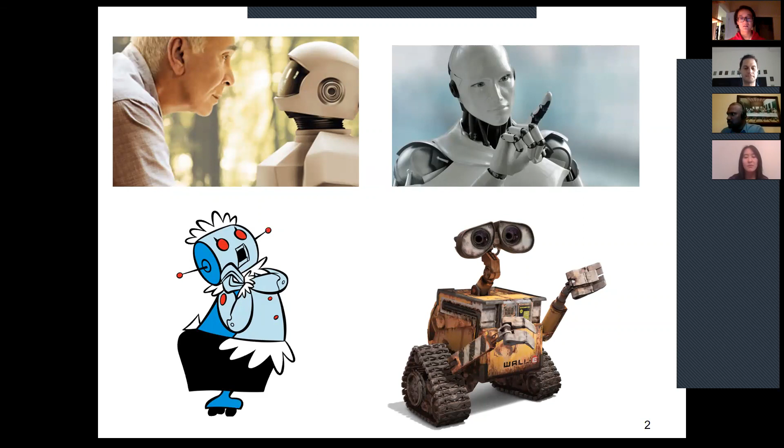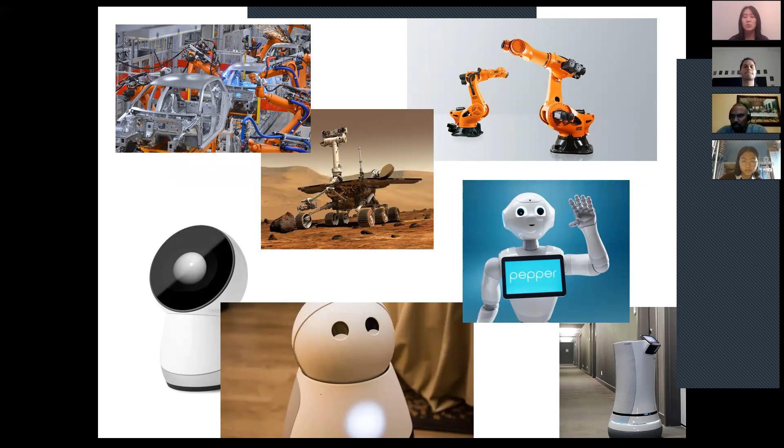And so those have been the robots that have traditionally been very successful in the past 30, 40 years. But more recently, hopefully people have been seeing the news, robots that have been a lot more social and friendly and can be deployed in environments where there are people around.

So you have robots such as on the bottom left, the Jibo, and this one is the Kuri from Mayfield. These are robots that actually are intended to be put in people's homes. They're supposed to interact with you, they're smarter.

And the reason why this has started to happen in the past 5 to 10 years is because hardware in general has just gotten cheaper. Things like these robots on the top are hundreds of thousands, if not millions of dollars when it comes to building these kind of robots.

But these robots on the bottom start to become in the hundreds. The reason is things like sensors, cell phones, cameras, accelerometers, all these things, because they become mass production, become hundreds of dollars instead of hundreds of thousands. And so this gives rise to computers that are smarter and smaller, and they can fit in these small form factors, which means robots can start to be useful.

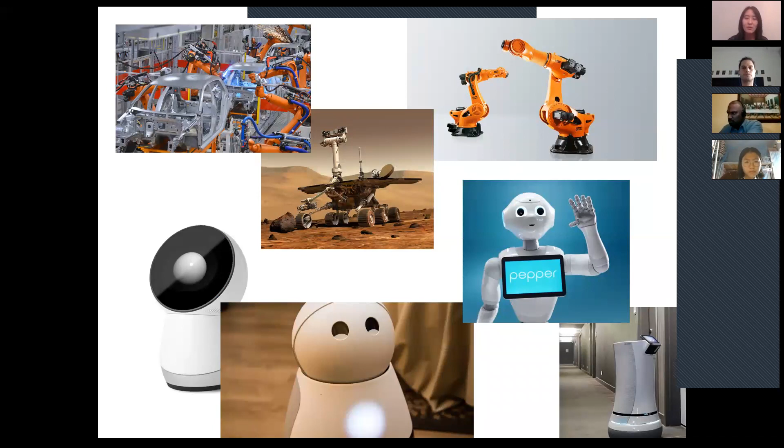With that said, robots are still really dumb today, and I'll give you some recent videos, some of the state-of-the-art things happening with robots. But before I get into some cool robot videos, I want to talk about robotics and what it means to be studying robotics and doing robotics.

So robotics actually encompasses a lot of different disciplines. You have traditional disciplines like mechanical engineering, electrical engineering, which build essentially the muscles and the control and the power of motion. You also have aerospace engineering that does a lot of the dynamics and controls and planning of how you actually get from point A to point B.

Then you have some of these newer fields like computer science and cognitive science and psychology that really want to try to give the robot actual brains, AI essentially, artificial intelligence, and really try to study how we as people function and think and process the world, and how we can translate those into computational models that the robot can then understand and use as well.

Another field with a lot of success in robotics is biomedical engineering. One of the most successful robots is the Da Vinci robot, a surgical robot where a surgeon can sit at a console and control the robot remotely while it performs surgery on a patient nearby. Because the robot can be much smaller than a person's hand, you don't have to cut the person open completely to perform surgery. You can have small incisions, which means faster recovery time and less trauma overall. At this point, thousands and thousands of these robotic surgeries have already happened.

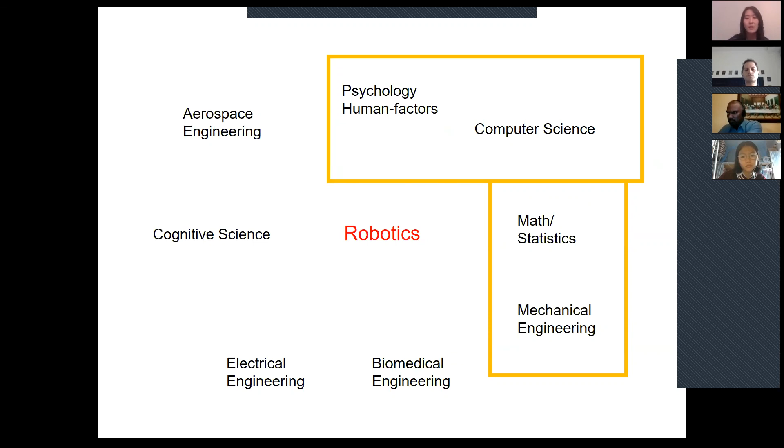Okay, that's a lot of information, so let's have some cool videos to break it up. This next one is a really recent video from a company called Boston Dynamics. They probably released it earlier this week, and it shows the state of the art of what we can do with robots.

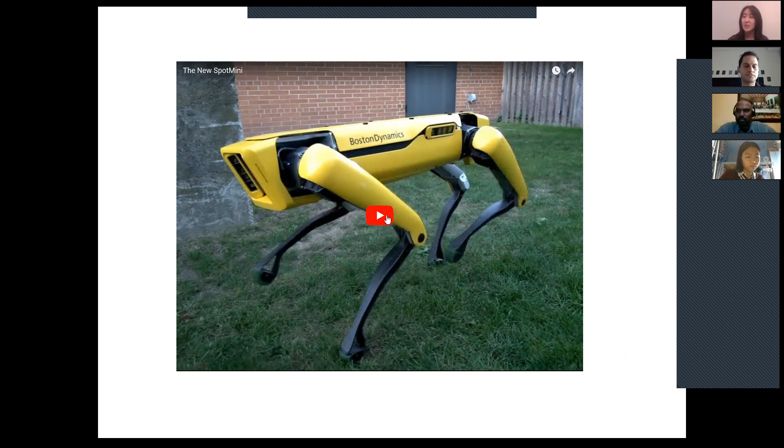This is what they call their Spot Mini. It's supposed to be like a robot dog. Hopefully you guys can see it.

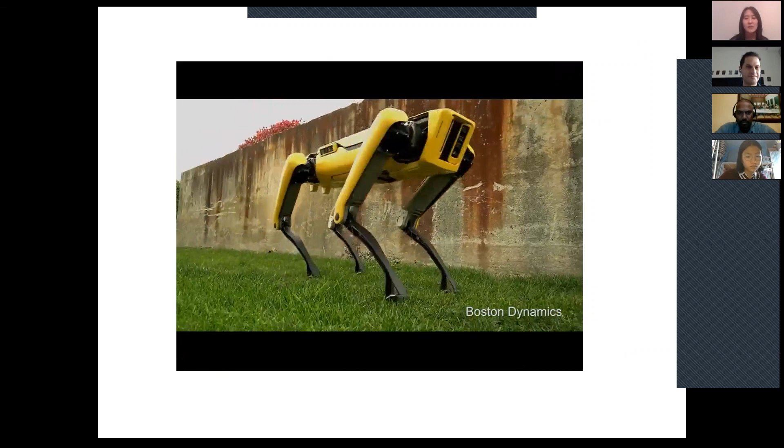I think the company is trying to make the robot cute and adorable, but I think it's very creepy. Creepy, I agree, the robots are usually really creepy looking. Yep, Boston Dynamics, I like it. I want one. You want one? Yeah, there's a lot of people who do.

It's definitely amazing in terms of what it can do. I'll show you another video they just released showing how amazing they can get the robots to do stuff, and then I'll show you how in reality robots probably can't do that all that well all the time, they're mostly there to do it for videos.

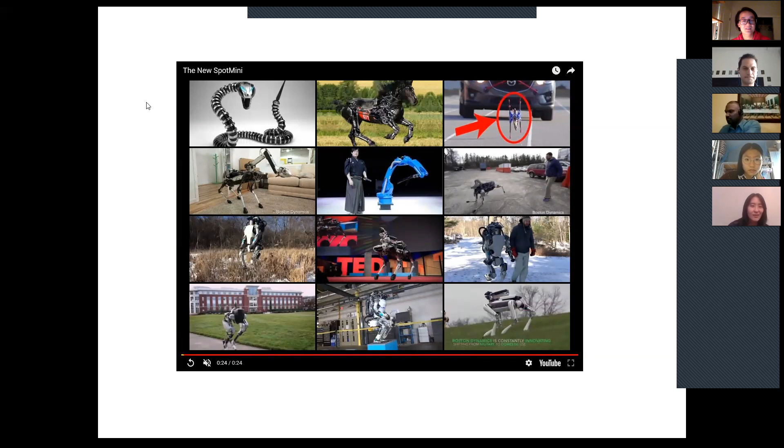Here's another really, really cool new improved robot video I saw in my Facebook feed this past week. Robot parkour.

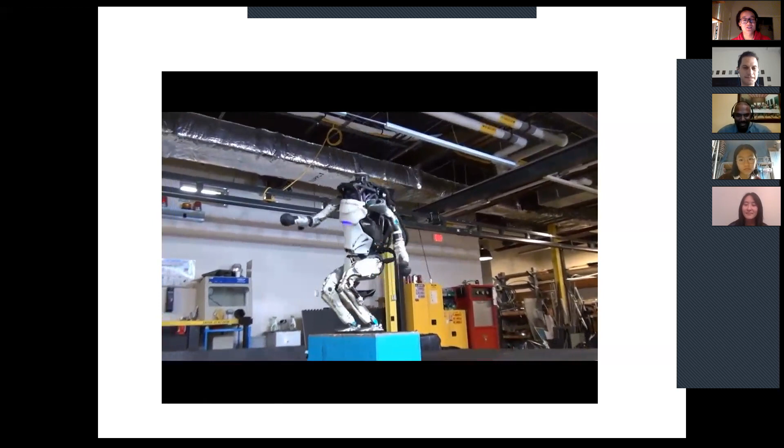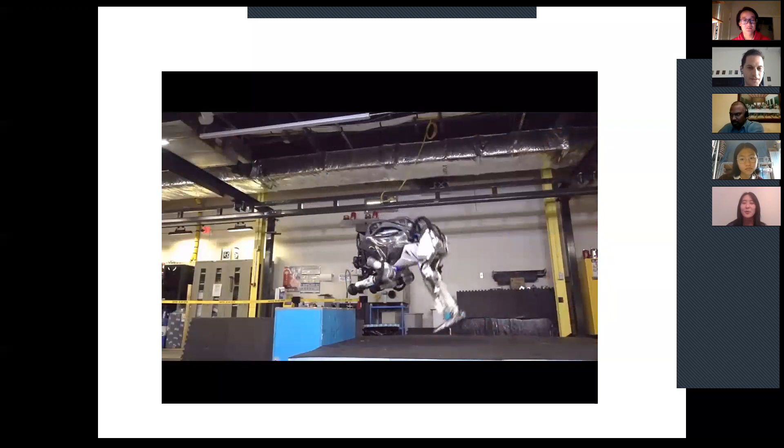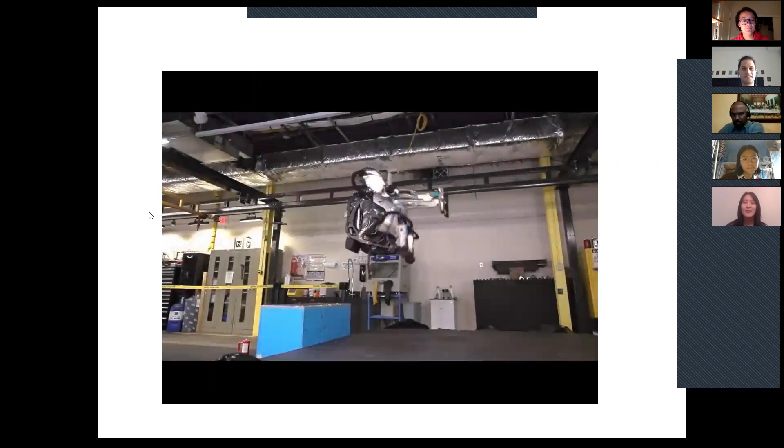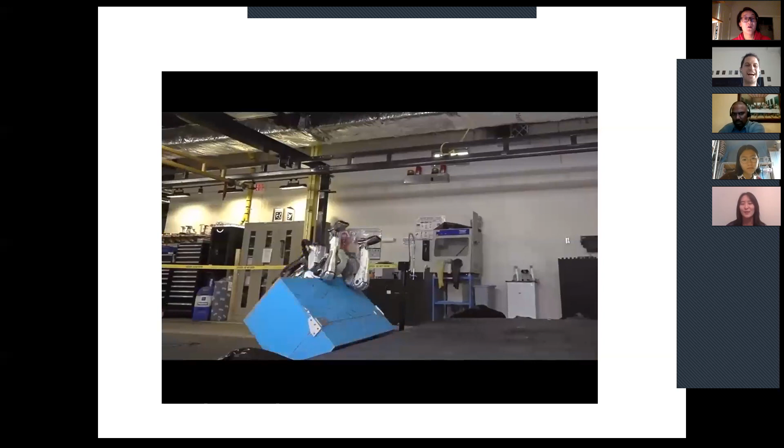The robot is doing some pretty crazy acrobatics here, but what they're not showing, and they actually do show a few bloopers, is that the number of times the robot has probably had to do this is in the hundreds of thousands to get this one video where the robot can successfully do it. Just to drive that home, and show what robots really can do in terms of capability before I show my videos, to set expectations.

This is a video from the DARPA Robotics Challenge. DARPA is a government agency that funds a lot of the research that happens in the US, and they have these grand challenges. In the past 10 years, one grand challenge was self-driving cars. More recently, the DARPA Robotics Challenge was all about getting humanoid robots into disaster environments. The motivation was Fukushima, and how we couldn't get people in to turn off critical valves and do the things that needed to happen.

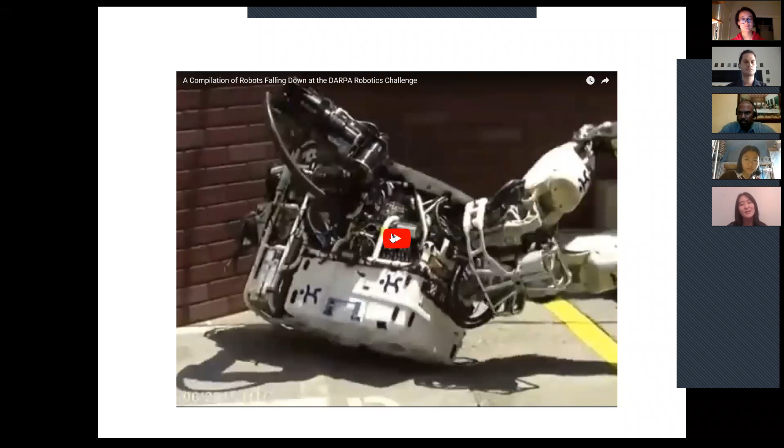So they said, okay, can we get robots to be humanoid, with arms and legs, to crawl through the rubble, to turn pipes, to turn things on and off? This was the finals, I think a year or two ago, state of the art, with all the top universities competing with these robots to get them to do things as simple as walking upstairs, walking on sand, and turning valves. This is just a compilation of those robots not succeeding the majority of the time.

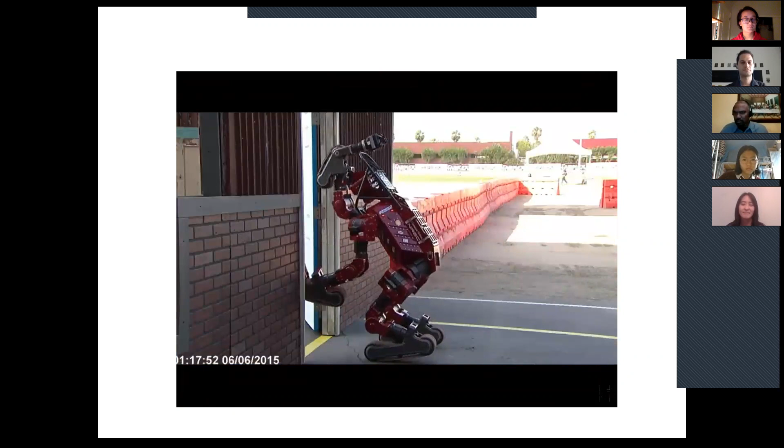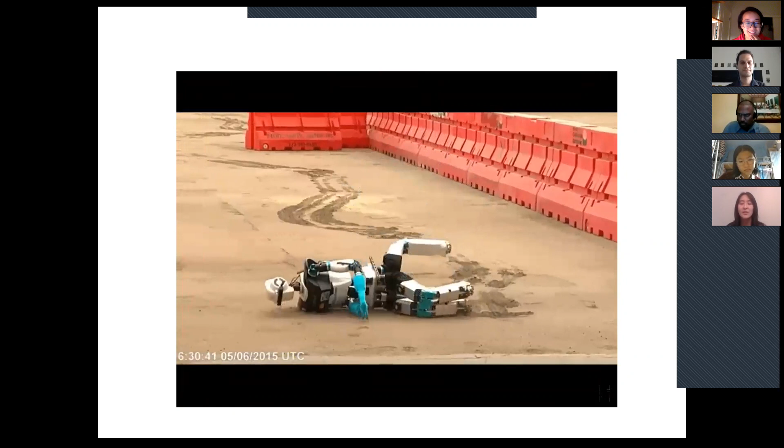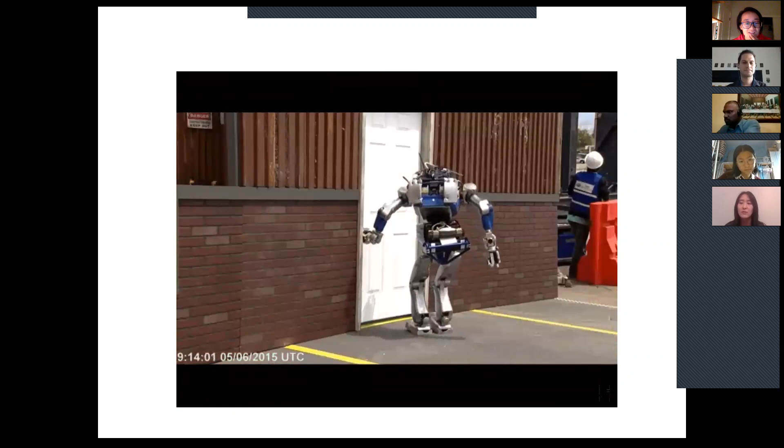So walking is actually really difficult for robots to balance. There's between 30 and 40 different actuators these robots have to be able to balance, and for full body motion it's almost 120 different actuators that have to work together to make sure you don't fall over.

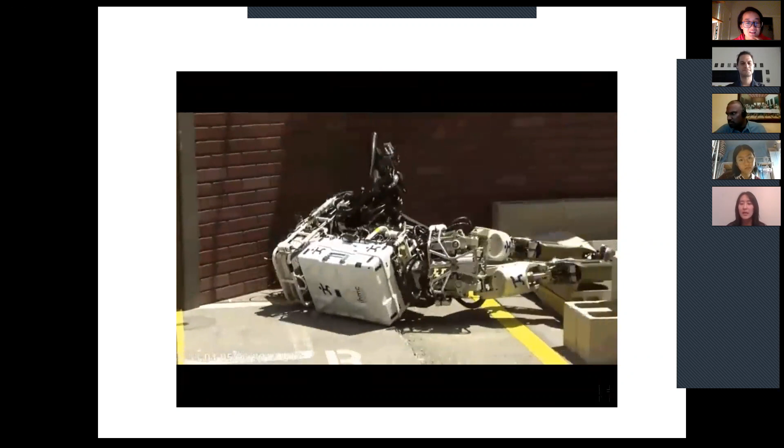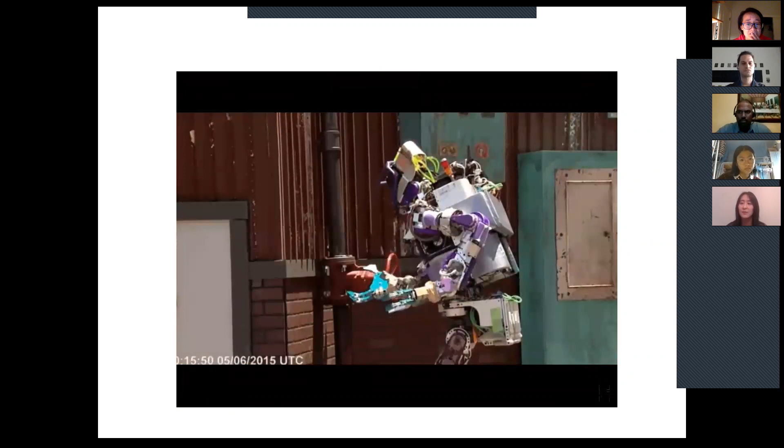And the interesting thing about this challenge was that this actually has not very much intelligence built in. These robots are all controlled remotely through several monitors, many different people, all with different types of joysticks and controls to try to get the robot to do these kinds of things. And they're still struggling to just do the basics.

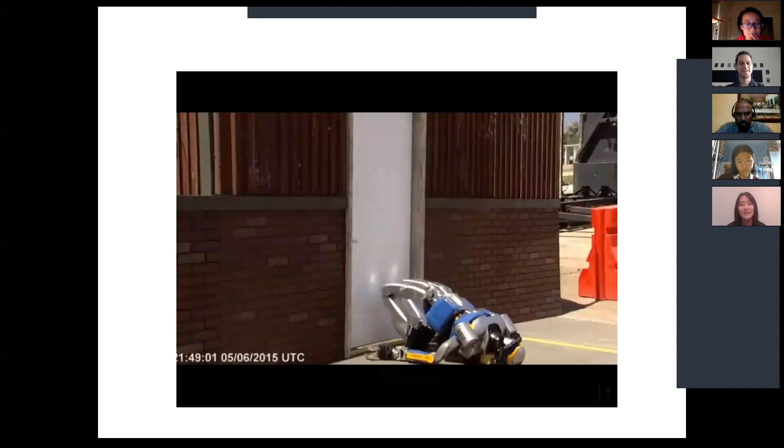So yeah, if you look up robot failures or DARPA Robotics Challenge failures, you can see a lot more, as well as some interesting soundtracks that go with them.

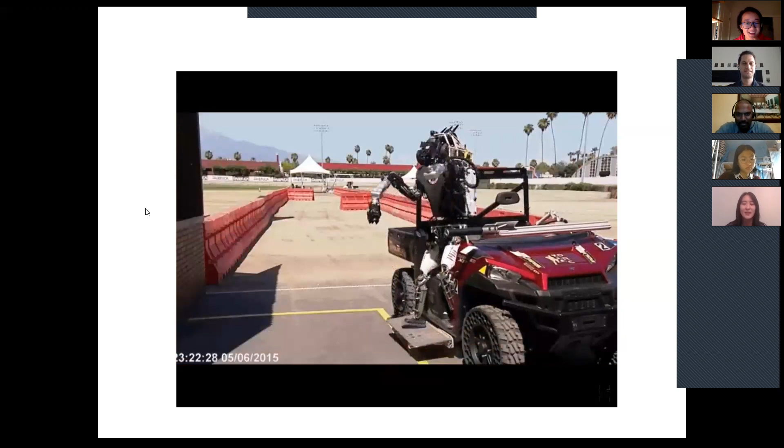So in terms of my own robotics projects, I guess I'm now gonna go through some of the things I've done, and how they relate to where I am now.

So this was a project that I did in college. In particular, we were trying to understand how to get a helicopter to fly on its own. So for those who are unaware, helicopters are really, really difficult to fly. In general, real helicopters obviously are very hard, but even just these miniature 6 degree of freedom helicopters actually take many, many hours to learn how to do.

So what we did for our project was we took an accelerometer—these are the sensors that are in your phone that tell you essentially where your phone is facing at any point in time—and plugged that onto a circuit board and attached that to the helicopter.

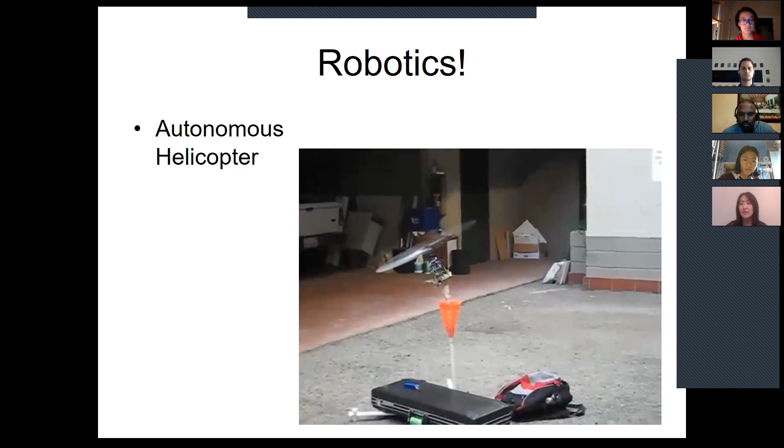And so by doing that, we essentially connect what the robot thinks it is doing to the motors so that we tell the robot, okay, make sure you're always in this state, and make those motors do what they need to do to be in that state. We essentially use PID controllers to do this, which is a very classic type of control structure used in aerospace as well as electrical engineering.

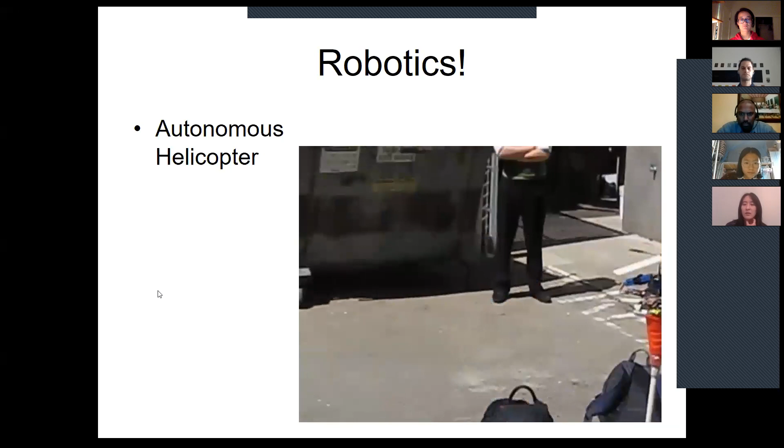So, video. You look like a boss. This was such a long time ago.

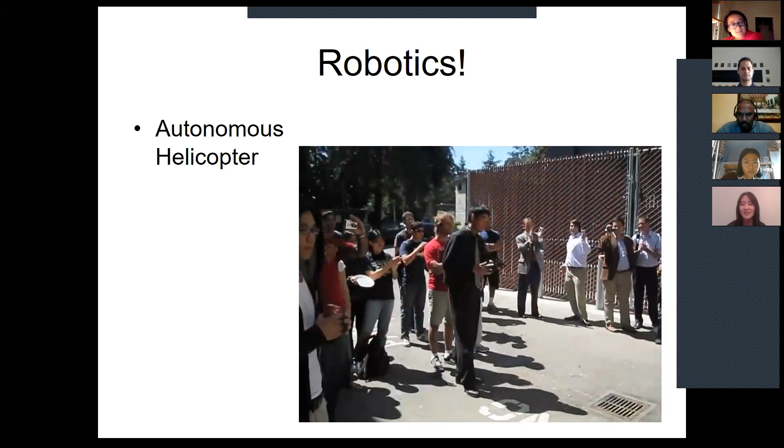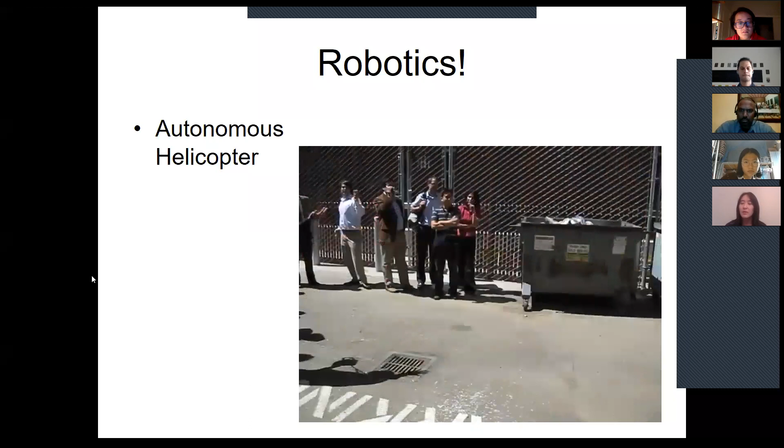Much faster now, it just comes off the stand. We later pan back to show my teammate—he's not touching the controls, he's just letting it go. So basically the helicopter in this case is hovering and balancing without us having to do anything, by using these control signals. And in fact, it's better at it than we are.

Okay, I realize I turned off my sound, in which case I can't hear what you guys say.

So this is another project I had in my master's program. And the class, as the final project, wanted us to play robot hockey against each other. So that meant that every team got to build their own robot—3 robots—and then the robots had to play against each other in hockey.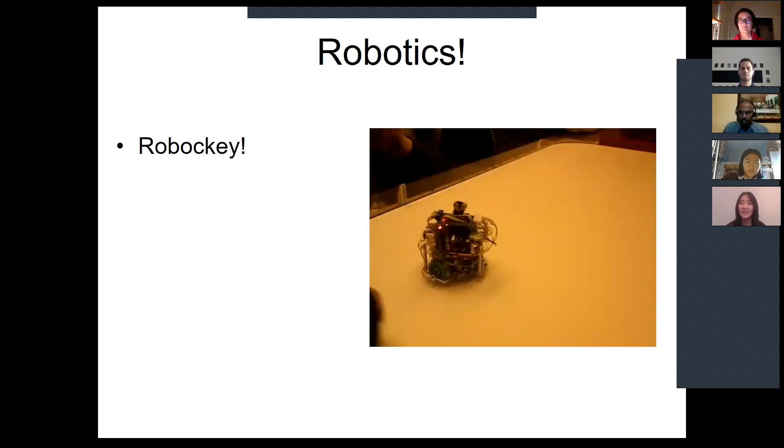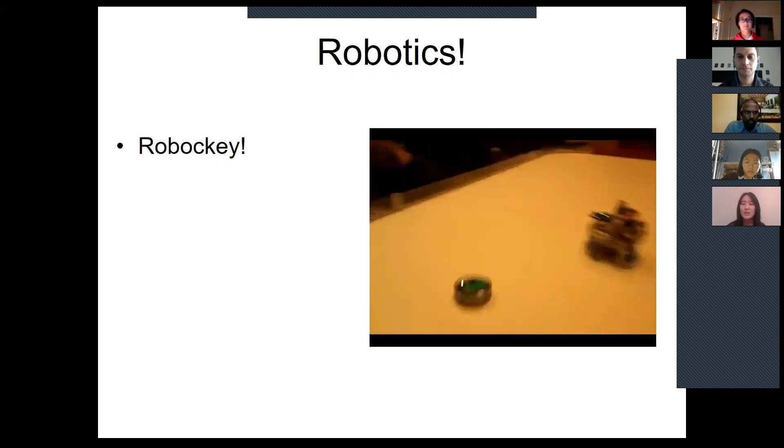And so here's a video of just getting the robot to try to find the puck. So in this case, some of the technologies that we used—that's a good shot. I really wish I knew how to turn off the sound on these videos. Anyways...

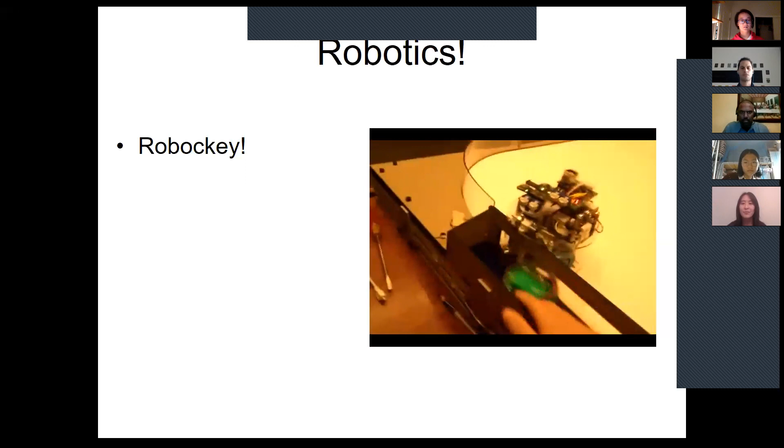The puck itself has IR light that is emitted. So this is sort of the light that you have in your remote controls when you point at your TV, and the controls for the TV—so then the IR light that comes from that is essentially what this puck is emitting. And so the robot is looking for this light and essentially going from there and finding it.

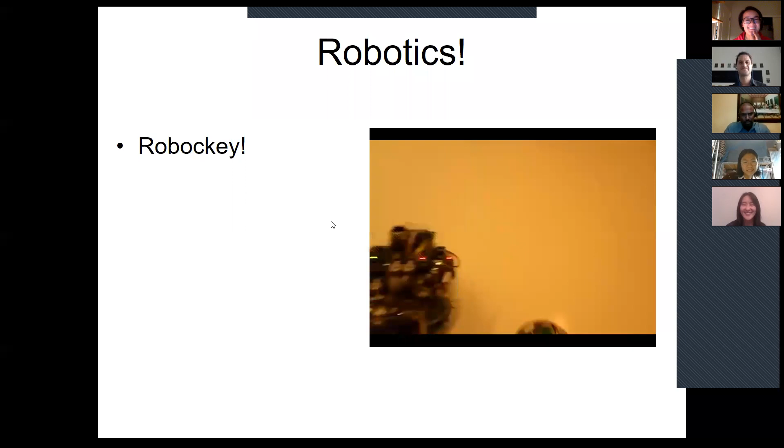Okay, so that's Robockey. So those are some hopefully interesting robot videos that can give you a sense of what we mean by robots, sensors, actuation, and movement. I'm going to walk through my own research now and how it relates to what I'm really interested in and trying to get robots to do.

I mentioned before there's a lot of robots on factory floors, and that's where the majority of robots are today. These are robots that have barriers along the side preventing people from walking near them. They're essentially behind cages because they don't sense the world. They can't tell if a person is walking, and if you get in the way, you will get hit by these robots.

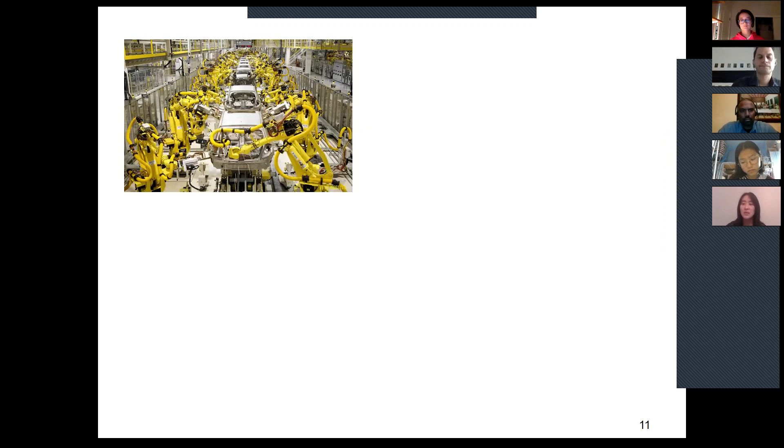What I want to do in my personal research, and a lot of research being studied right now in robotics, is figure out how to go from this environment to something like this really messy room. How can a robot that doesn't sense anything now sense this, be able to tell that it's messy, that things are in the way so it doesn't trip, and not destroy my monitors on the left when it swings about? How can it actually do this?

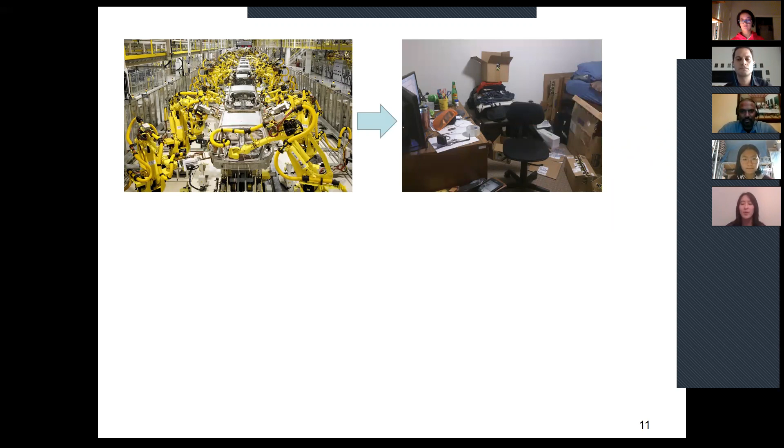My research really focuses on how robots can use the different sensor inputs that we as people have, that robots actually don't use. State-of-the-art robots focus entirely on using visual inputs. A lot of them just have cameras attached to see what they're seeing, and that's all they really use.

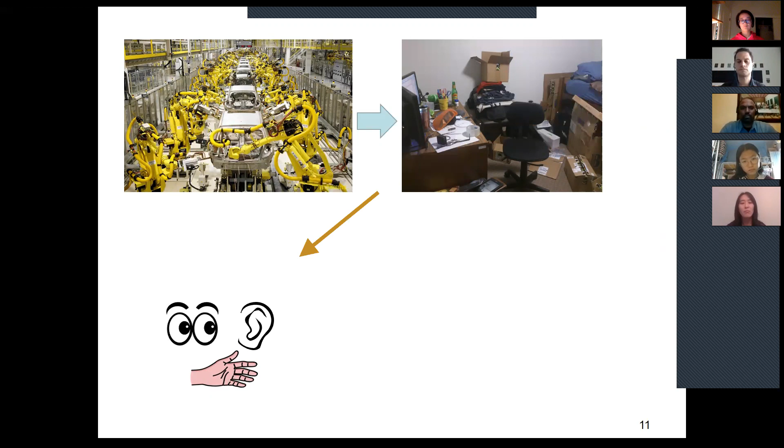What we use as people, for instance if we take this lamp: if I want to turn this lamp on, I use my visual feedback to find the chain. I use touch sensing to be able to grasp the chain. I also use force to figure out how much to pull so it doesn't tip over. Then when it actually turns on, I hear a click, so I hear the audio feedback. And hopefully the light will turn on, so you have that visual feedback.

This whole integration of sensor modalities is what really allows us to be more robust to different changes in the environment. For instance, if I'm trying to turn on this lamp, and I feel the click and hear the click, but no light comes on, I can start to reason that maybe the light bulb has gone out. This kind of intelligence doesn't exist in robots today, and that's what my thesis has really been focused on.

So the question really is, how do you get a robot to learn about these different modalities? In particular, the challenge is that for the robot to learn about sensory inputs, like touch—what does it feel like to turn on the lamp—it physically has to go turn on the lamp. So how do we get a robot to do that?

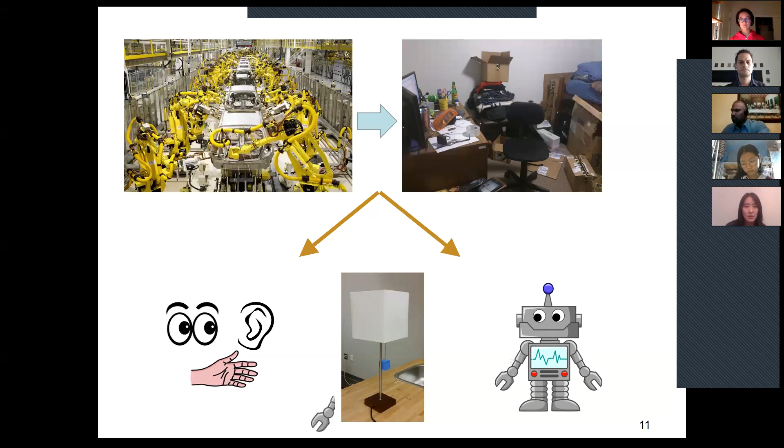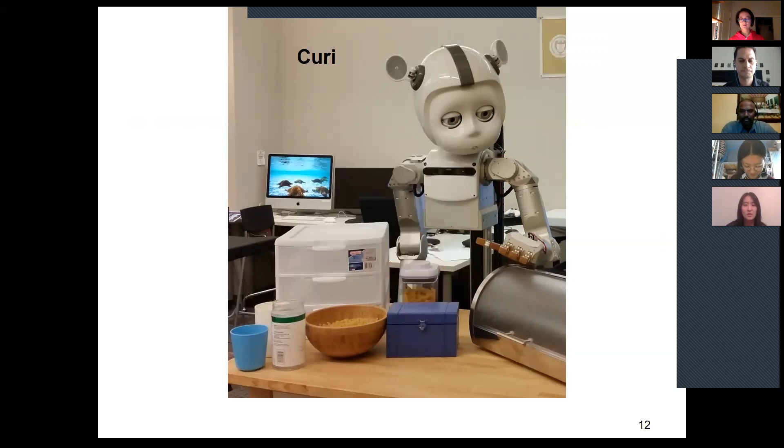This is the robot that I use in my lab. We named the robot Curi. Curi has a lot of different sensors and actuators. It has a 7 degree of freedom arm. A degree of freedom is essentially a degree that you can move, so it has 7 different motors in the arm, allowing it to move through space in a very wide range of possibilities. To represent a point in space, you need 6 degrees of freedom, so if you have 7 different joints, you can reach all different degrees of freedom.

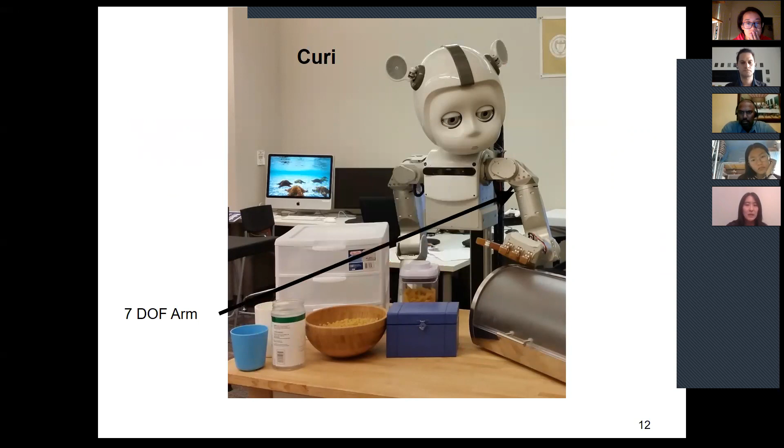Inside the wrist of the robot hand, we have what we call a force torque sensor. This means it can actually feel when it's hit the table, and it can feel how much pressure it puts when interacting with different objects.

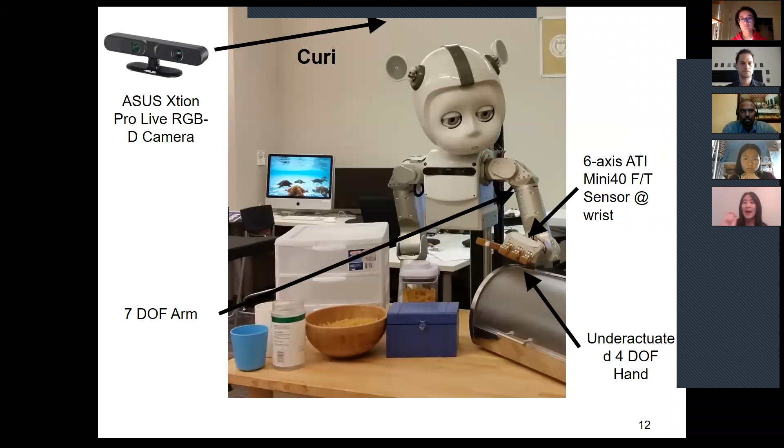Mounted above, as well as in its chest and its eyes, we have cameras. The interesting thing about these cameras is that they're RGB-D cameras—the D means depth. This means the camera can tell the robot how far away things are in space, which is actually very difficult to do.

This camera is essentially identical to the one you get with your Xbox—the Xbox Kinect is this camera. Prior to people having the Xbox Kinect, they had to spend maybe $10,000 to $20,000 to build a camera with that kind of setup, and probably an entire PhD thesis to get it to work. Whereas now you can just pay $100-something to get this sensor and put it on your robot. This has really revolutionized the whole robotics area in the past 10 years.

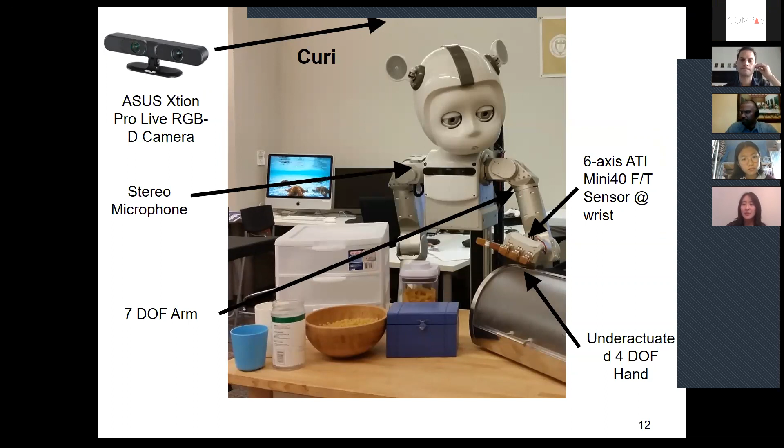We also have microphones in the chest, so this is how the robot hears things, so that we can capture audio sounds to learn from. And I mentioned how we need to actually have the robot physically interact with the world in order for it to learn about the different senses.

If it wants to understand what it feels like to lift this lid, it has to go lift this lid. But to program a robot to actually get that lid off of a jar is not easy. I would have to sit down at a standard programming interface and maybe spend weeks or months saying, okay, I want the arm to go to this position, then this position, then I want it to close its hands at this exact location. When it feels this much force, then you want to lift. So this whole process is not easy.

So what we do instead is take inspiration from how we as humans learn from other people. In particular, when I want to show someone how to do something, or when parents show children how to do something they've never done before, they will physically show the person how to do it. So we use this, and we call it kinesthetic teaching, where we just physically show the robot how to do this.

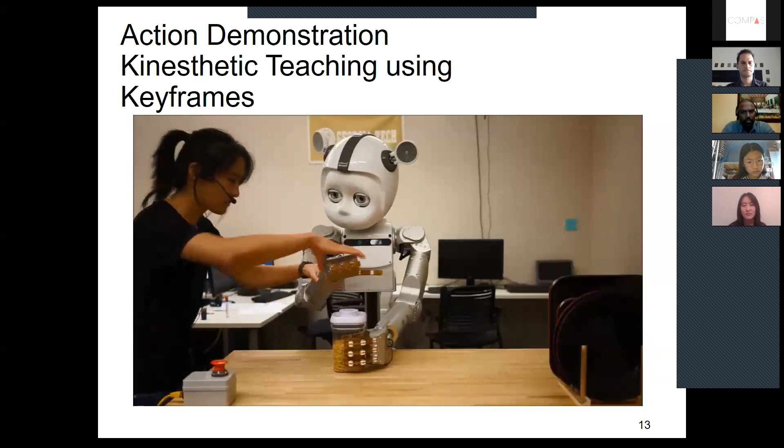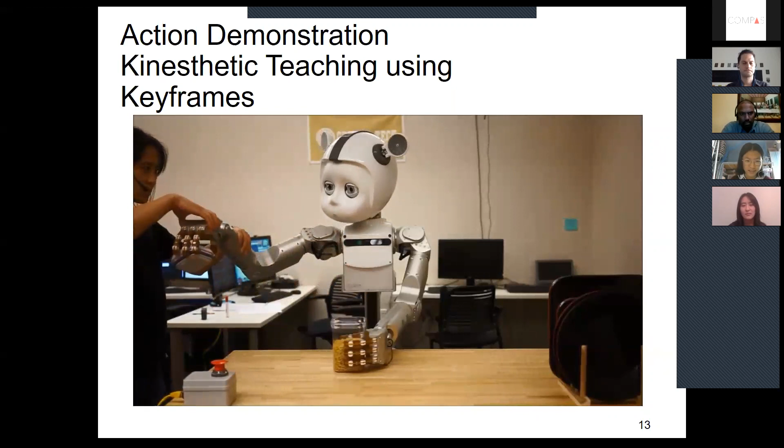Start here. Okay. Go here. All right. Close your hand. Yes. Go here. All right. And here.

So aside from now showing the robot how to go do this, there's a couple of things you saw in this video that are very important, in general, to social robotic research. You'll notice that we use voice to be able to control the robot, and you notice that the robot actually responded, right?

When I said go here, start here, the robot says okay. This gives me feedback while I'm teaching that the robot heard and understood what I was trying to show it. And then, hopefully, you'll notice that the robot was looking at where it was going. This is also another cue. So when I talk to you and show you how to do something and look at something, if I see you looking at where I'm pointing, then I understand that you have also understood my feedback.

So these are some of the interesting things in social robotics that are incorporated into these learning systems, which really are important to the overall system. Now that we've physically shown the robot how to do it, the robot can just take that exact thing we showed it and play it back.

Some things you might have noticed in the video are that the robot did fail quite a few times before it actually got the lid off of the jar. That's actually useful to know, because there's a person helping the robot along in this exploration, we actually collect both the interesting inputs from failing as well as it getting it correct.

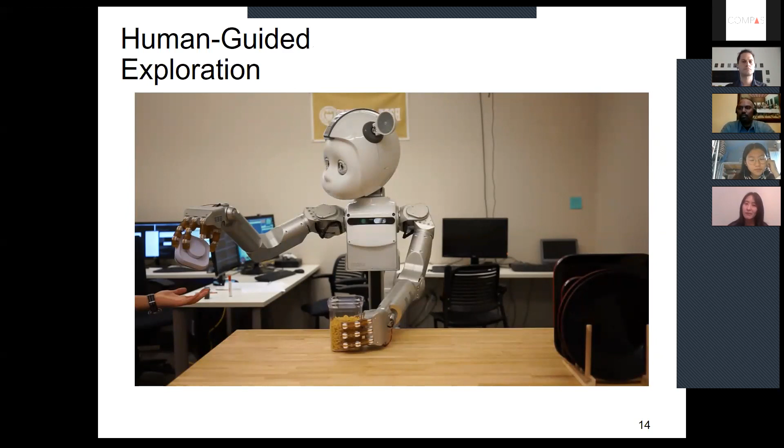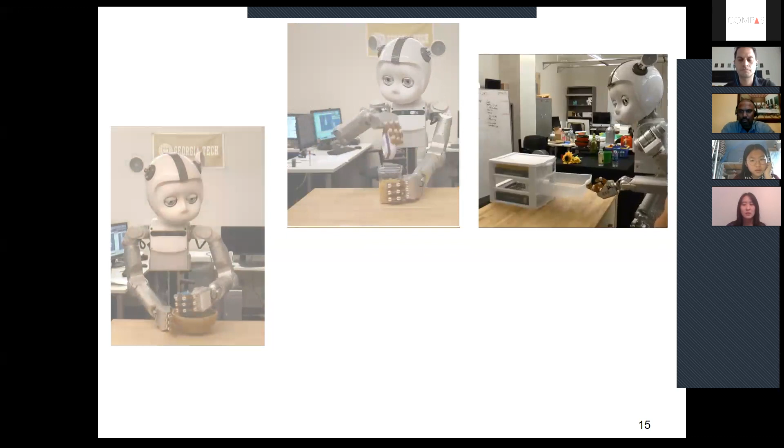Here are just a few videos of the robot using this technique to do all sorts of interesting tasks, like scooping pasta, getting the lid off the jar, opening drawers, and opening some boxes. This is essentially a quick way, because we use human guidance, to build these motions very fast and gather data, when typically it would take months to program the robot to be able to do this.

Okay, so this is essentially where I think we're around the 15-minute mark. I'm definitely happy to have questions since I know I've gone too quickly.

Otherwise, I do have more videos I can show, but I think it might be more interesting if people have questions about what they've seen.

I have a quick question on the technique you showed, where you show the robot how to do it. Is there a name for this technique?

Yeah, so this whole field is learning from demonstrations, or programming by demonstration. There are many different ways you can show the robot how to do things, and that's the field that covers it. That includes things like using a camera to watch a person and then having the robot mimic. The specific thing where you physically pick up the arm and move it around is what we call kinesthetic teaching.

So that's the particular technique. The reason kinesthetic teaching is a little bit easier is that I don't have to figure out what you're doing and connect it to my motors. You've literally moved my motors for me, and I can just execute those motor commands.

Another question I have is, how much of your research is robotics and how much is AI? Or is it something different that complements it? How does that relationship work?

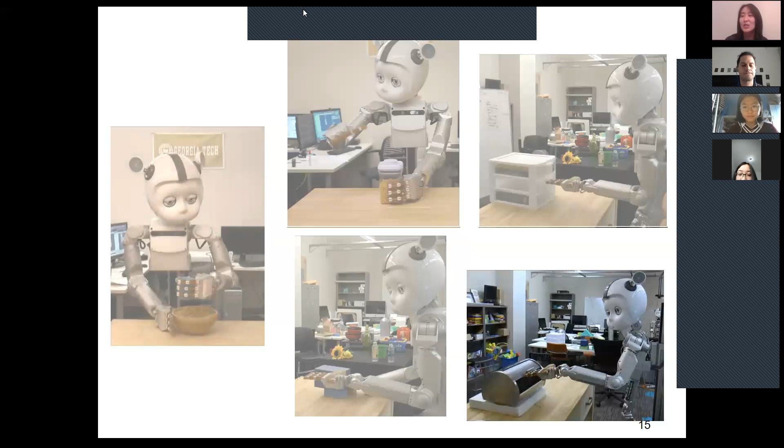Basically, it's very much what we call in psychology Pavlovian, where if you do well, here's a prize; if you do poorly, negative reward, this is bad. They've come up with the field of reinforcement learning that essentially lets the robot just wander and do whatever it wants. If it did something good, it gets a reward, and if it does something poorly, it gets something bad. That actually can teach it to do things on its own without someone programming it.

So that's definitely something robots will do in the future. The way I look at social robot learning and us teaching robots is sort of a stopgap in the middle, just like how you could learn things on your own without a teacher or a parent teaching you, but it's just faster if someone helps you.

So basically the way I see it is that if we can speed up the process, then maybe robots can become smarter in 20 or 30 years as opposed to maybe 50 or 60 years.

Oh, thank you. Mm-hmm.

I am Yeung, and I'm a third year student at my university, and my major is materials. Thank you for your presentation.

The Boston Dynamics released its new robot, and it's really a hot topic in China. But I'm not a student of robots, so I'm curious about how difficult it is to make the difficult functions come true, like the video showed us.

Okay Cynthia, why don't you chat a little bit about your work at Softbank and Pepper and how you got into the field, because that wasn't what you studied exactly.

Nope. Vivian, why are you still online? I'm figuring out how to leave. Bye, bye.

My work is not nearly as interesting as Vivian's. So in one of her earlier slides, you may have seen the Pepper robot. Pepper is a 4-foot-tall humanoid robot. Let me see if I can find a photo of her. I'm going to put the link on the chat so you can see. I can pull it up and share screens. I'm just going to put it on the chat. So this is our robot.

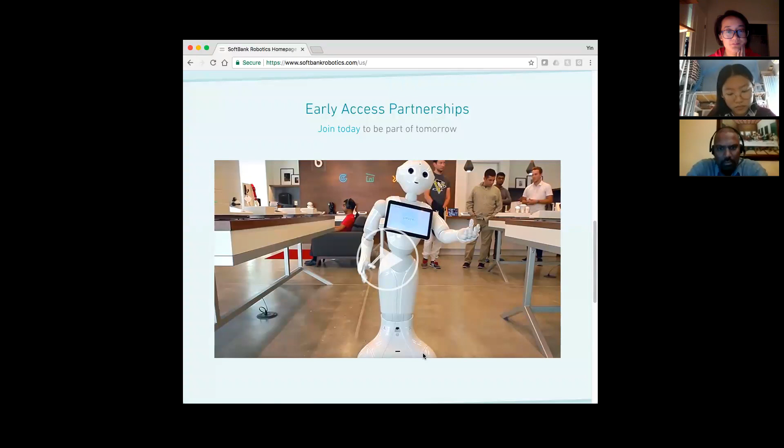The story of Softbank Robotics is also an interesting one. Softbank Robotics actually came out of the acquisition of Aldebaran, which was a 10-year-old French robotics company. This company had existed for a long time, until this really rich Japanese multi-billionaire called Masayoshi Son decided that this was a field he wanted to enter. Masa, ever since he was a little boy, was always interested in robotics, but it wasn't really something he could do himself. He ended up going into telecommunications and built this large multinational company called Softbank Group, one of the largest telecommunications companies in Japan.

Oh, you guys show a video? Sorry. Oh no, you might as well show the video.

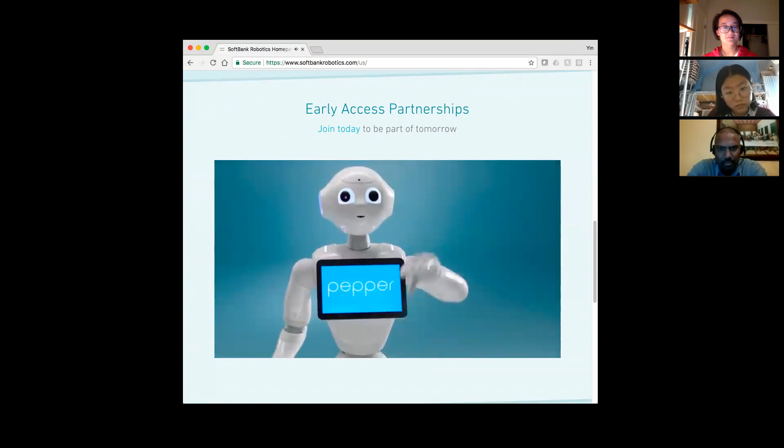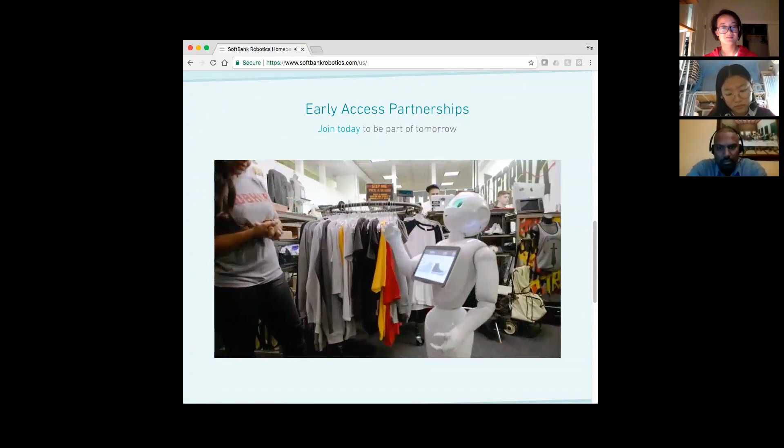Meet Pepper, the irresistible brand ambassador that gives your Marcom teams a powerful new way to engage with consumers and gives your sales force a helping hand for those mundane tasks that might otherwise prevent them from building better relationships with their customers. Pepper is designed to be conversant and interact with customers in a natural, engaging way.

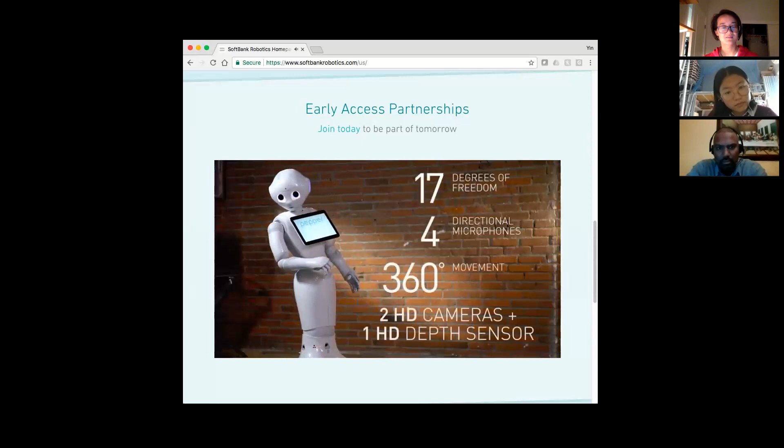Created with a unique combination of emotional intelligence and an array of sophisticated hardware, Pepper responds to touch, can listen, and even knows how a customer is feeling, which is why some of the world's largest and most innovative brands in the retail space have chosen Pepper as their brand ambassador, sales associate, and all-around engagement specialist.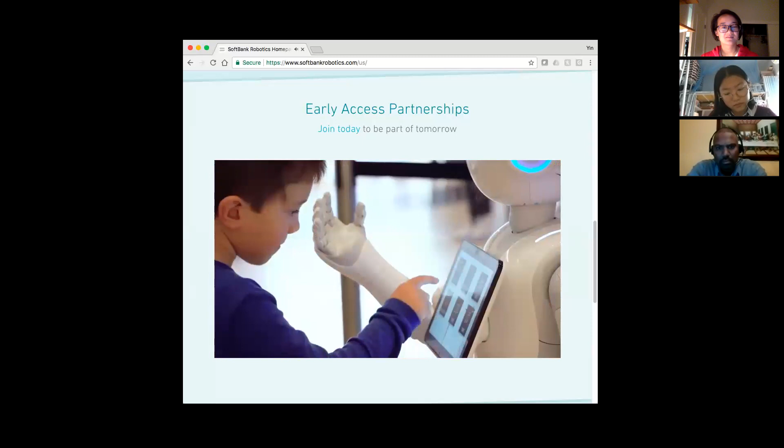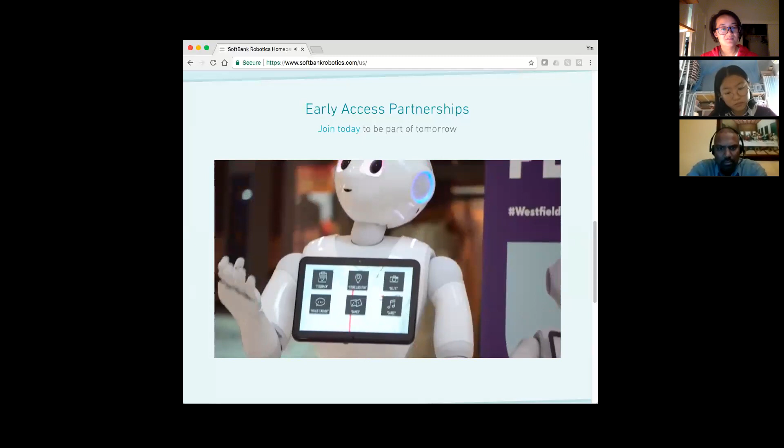Westfield, one of North America's leading shopping centers, partnered with Softbank Robotics for the launch of Pepper's first retail experience in the U.S. The benefits to Westfield's customers were immediate. Pepper helps that interaction with the concierge team by providing wayfinding, entertaining, and engaging our customers.

HMS Host is part of one of the world's largest providers of food and beverage services for U.S. airports. Pepper was chosen to be a host at their Pyramid Ale tap room within the Oakland International Airport, engaging with customers and offering food and drinks.

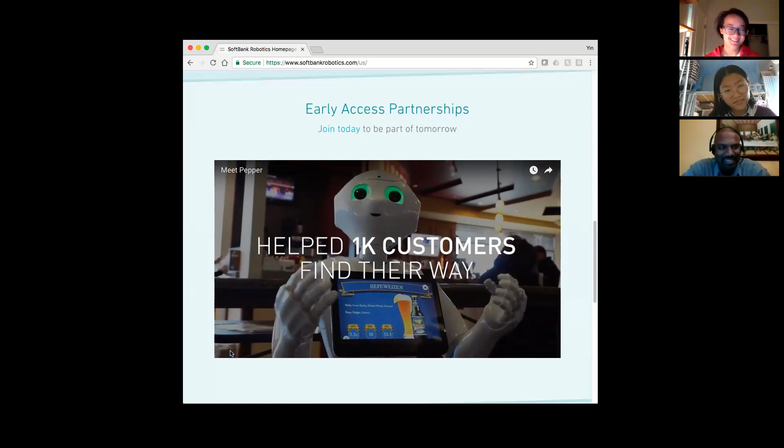Okay, I have to stop right here and say that I was at the Oakland Airport and saw Pepper there in front of the restaurant. Yeah, I mean, the rest of it, I don't know if it's really that interesting. It's basically just a really long commercial. Right. So you guys can watch it on your own time if you're really interested.

But I think it's a good counterpoint in many ways to what Vivian's working on, because what Vivian is working on is what I would like to call state-of-the-art, cutting-edge research problems. She's really trying to break new ground and solve problems that don't have a solution yet. With Pepper, we're actually doing something a little bit different. We're trying to commercialize, i.e. make money from an existing product that works today.

So, Pepper is our flagship robot. It is our primary product. And our problem is very different from Vivian's problem. Vivian's problem is like, how can I build a robot that will solve these problems for hospitals and nurses? Whereas in our case, we're really just trying to figure out how do we make money from our robot and build a business around that.

With Pepper, like I mentioned earlier, it was really the brainchild of Masayoshi Son, this Japanese multi-billionaire. He made his money from telecommunications, and once he had enough money, he decided it was time to revisit his childhood dream and wish fulfillment. I'm sure all of us have dreams from when we were younger, things we would do if we were rich. Masa was rich enough to fulfill those dreams.